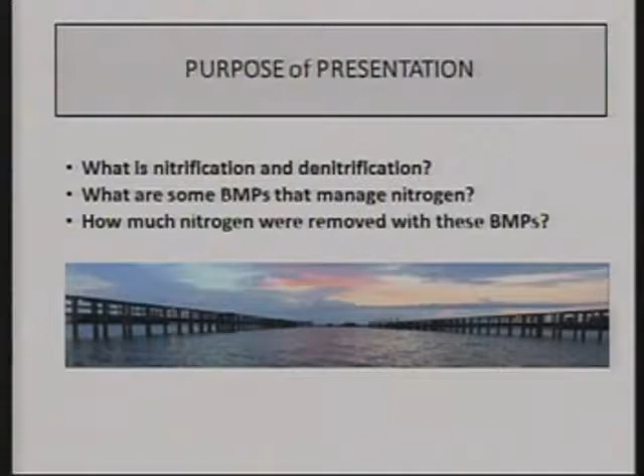Basically, I'm going to talk in general about what nitrification and denitrification are - very general terms, but I've put a lot more information in these slides for those who want to get into more depth. I'll also talk about some of the BMPs used to manage nitrogen and how much nitrogen removal we get when we do these. This is meant to be, in very basic terms, a tie-back to what the nitrogen cycle is all about, and there are various forms of nitrogen within this cycle.

The thing that normally gives us difficulty is the so-called nitrate form, because it's available for plant and animal life. We know the nitrogen cycle is definitely needed for life. In very simple terms, nitrification is the making of nitrates by bacteria, and denitrification is the process of making nitrogen gas using bacteria. Both require very special conditions to operate. For example, nitrification needs oxygen, whereas denitrification needs little oxygen - zero or very, very low. It also requires a food source - by food I mean nitrate is a food, and so is ammonia. So the whole system, to make it work, needs certain conditions to enhance the operation.

The abundance of these organisms is there. They're ubiquitous, they're naturally occurring. They definitely need water or soil moisture, not necessarily saturated conditions, but a soil moisture condition in which they can operate. If these basic conditions are there, we can use nitrification and denitrification for nitrogen control from fertilizers, either in green roofs or in plants that are in grassed areas and so forth.

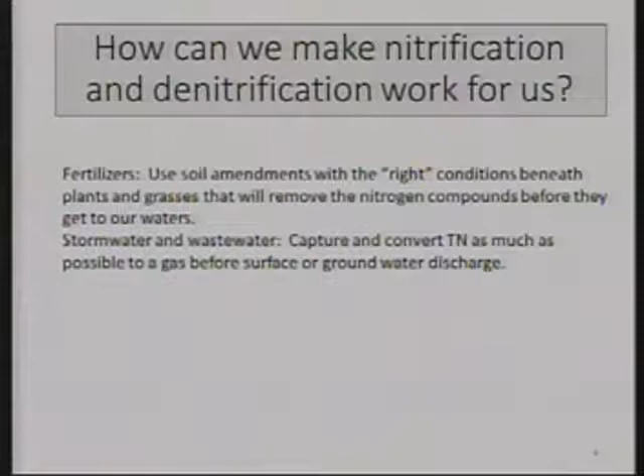And of course, we could also do the nitrification, denitrification cycle in the capture and conversion of the nitrogen forms into a nitrogen gas, which is then released to the atmosphere. So in one case, you can hold the nitrogen compounds that are needed for the plants, so the plants can use them. And in another case, you can convert that to nitrogen gas. And that is if you have these right conditions.

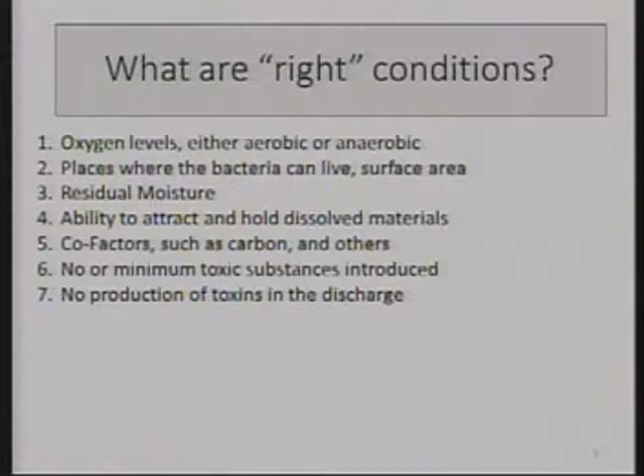I'm just going to concentrate a little bit on the moisture concentration. You have to have moisture within the system. You have to have no toxic substances, and you cannot produce toxins either. I've examined over 50 different naturally occurring and recycled materials in our research, and some of them are toxic, especially at 100% usage. Others are non-toxic when you reduce the amount of composition. So if you use 5% or 10%, they're not toxic to the environment. But you have to make sure that any kind of enhancement you use for the bacteria to grow doesn't result in toxic conditions.

Also, you want to do something that has a long life expectancy. So you want to minimize the operating cost over a long period of time. And of course, when you get down to it, you want to look at the maintenance costs and so forth.

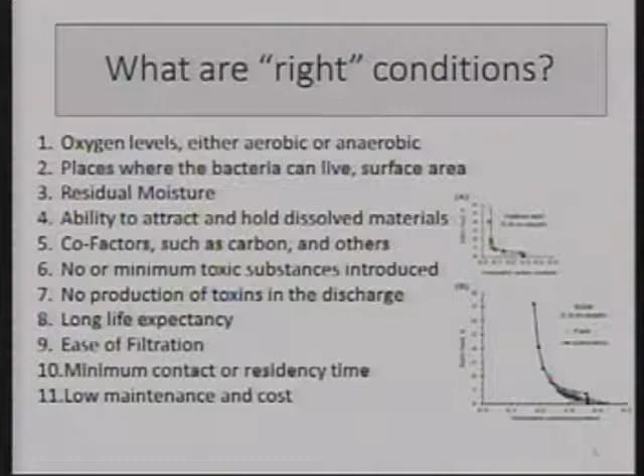We usually look at a BAM mix that has a dry period of 30 days. In other words, the soil moisture will stay in there enough to support the bacteria for a quick recovery within 30 days, if it has a dry period of 30 days.

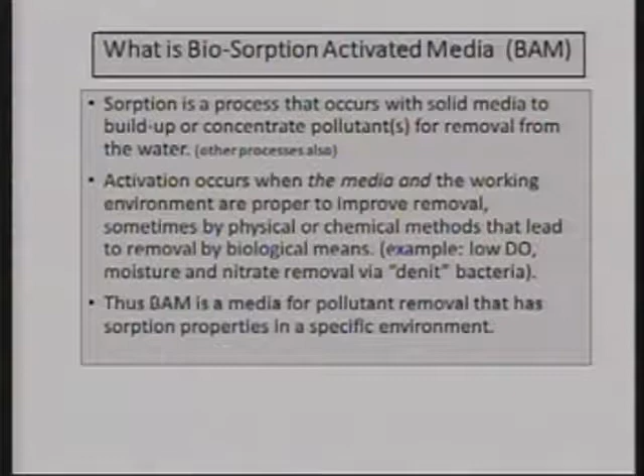Now, I've used the term biosorption activated media. It's simply a solid material which accumulates pollutants in a dissolved format and then turns those pollutants into some other form, such as nitrogen gas through the denitrification process. It has to have a specific environment.

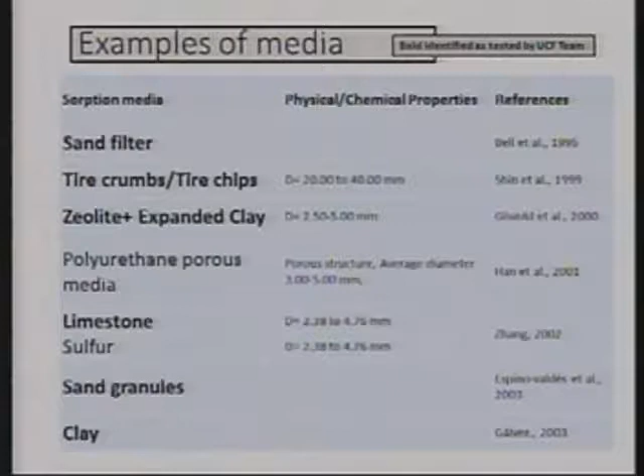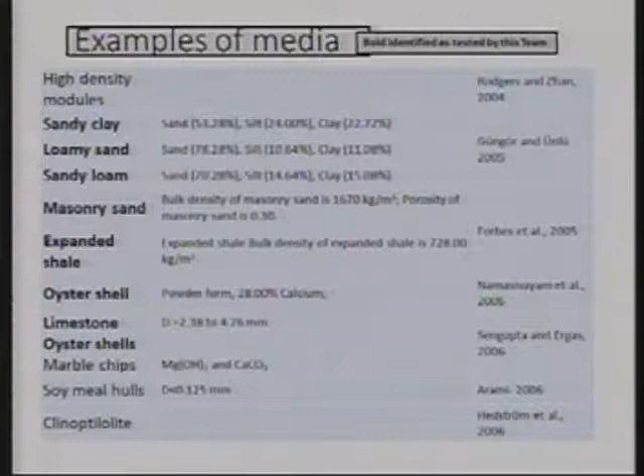Now, I said I've worked with over 50 of these in the past, and these are just some of the ones that are bold on the screen that we have extensive work with. I've also provided references of other people that have worked with these systems. All of them have certain qualities associated with them, and of course a cost associated with them, which has to be dealt with when you're deciding on what kind of mix you want to use for a particular application. So I've listed all of these for your review.

I also wanted to mention some of those that we have used beyond the kinetics, and kinetics just means removal. All of these have been known to remove pollutants, okay? And I've dealt with many of these ever since 1977, so we've had a long, extensive history.

And these are systems in which we have a downflow application and also systems in which we have, I would say, extensive data to support the results, including a lot of toxicity testing. With some of the toxic results we have seen, they were caused by tannins, which are commonly found.

Within some of the wood species, but it's also found in situations where in anaerobic conditions you find yourself actually producing ammonia, or the cycle reverses itself.

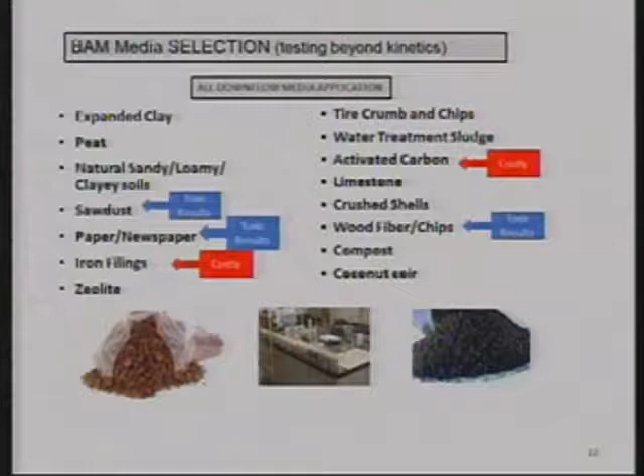But iron filings and activated carbon are costly, but still do a very good job. Why would newspaper be toxic, do you think? The discharge from newspaper? Well, it's the print, it's the ink. The ink becomes toxic. Compost, because of metals, it's hard to get a good compost that's free of metals, so they become toxic.

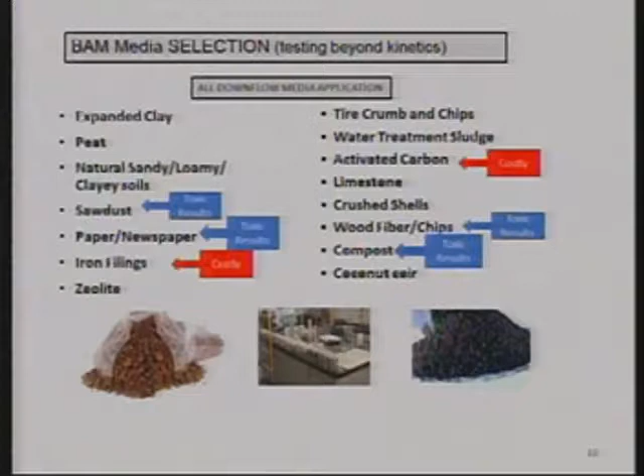Wonderful results with coconut coir. We continue to work with it and continue to use it. I work in the state of Washington and Oregon, where I'm using coconut coir out there because it's available from the islands, from the Pacific. It comes in handily to them. It's still expensive for them, but the salmon industry means something to them, and we're taking out the pollutants which are harmful to the salmon industry.

Peat, I had a hard time finding consistency with peat, especially with the organics in peat. However, I'll say that all of these work. It's just that you have certain problematic areas, especially if you use it at 100% and find toxic results.

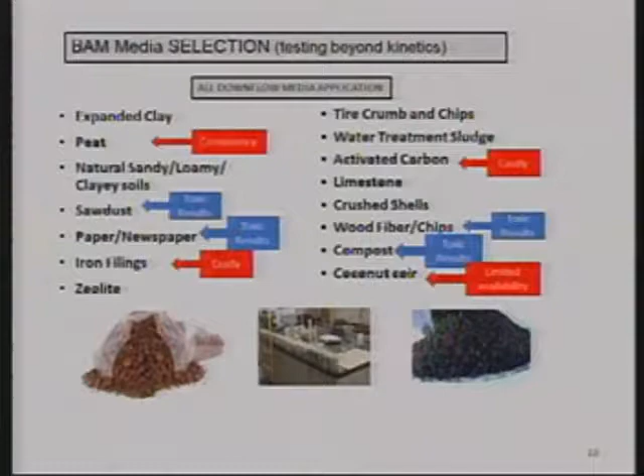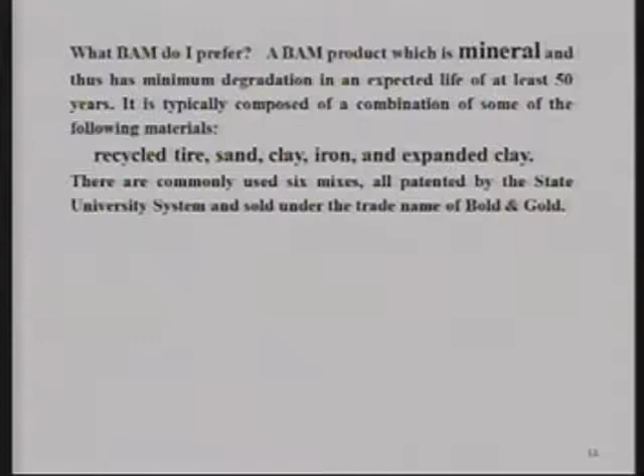I prefer a BAM material which is mineral, which means it exists for a long time, it doesn't decay, it doesn't have organics in it. I have typically used recycled tire, sand, clay, iron, and expanded clay. In all of these mixes, you don't have to use all these blends, but I've used at least six mixes in sites, and I'm going to talk about some of those as I show you the presentation today.

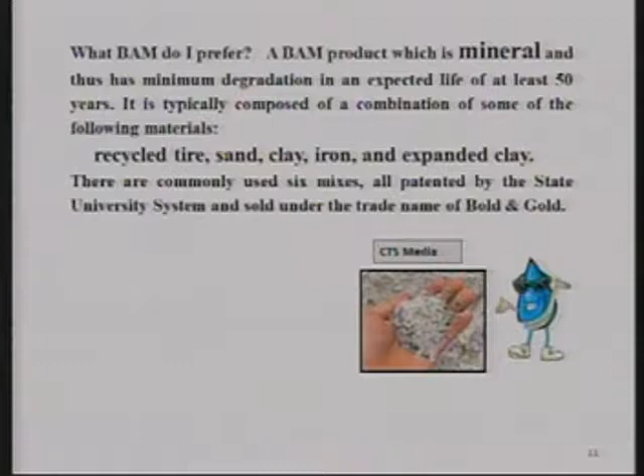One of the media we use is called the CTS media. It's basically sand, which allows that filtration. It has clay in it also. So these blends have been used.

Recently, I started in Pennsylvania, North Carolina, South Carolina, and Texas with applications. Right now, we have a team out in California looking at some California applications. Within Florida, we have over 400,000 square feet of this stuff being used, and with good results.

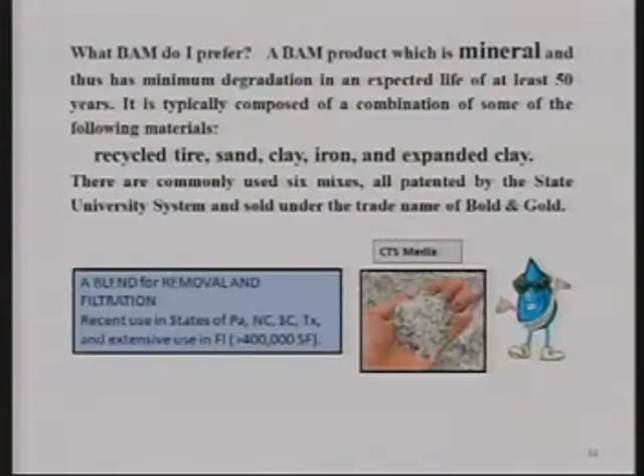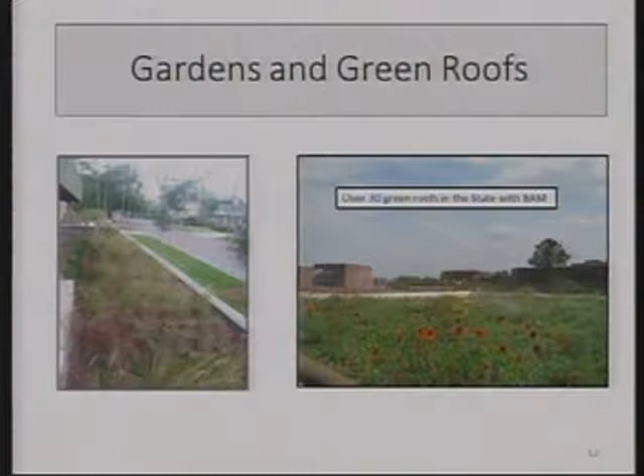There's over 30 of those green roofs within the state of Florida. And the one that's the largest is the Escambia County roof on their one-stop permit building. It's 33,000 square feet, and they've reduced their nitrogen down to an acceptable target level for discharge to the bay up there. There's always ways we can estimate what the efficiencies are.

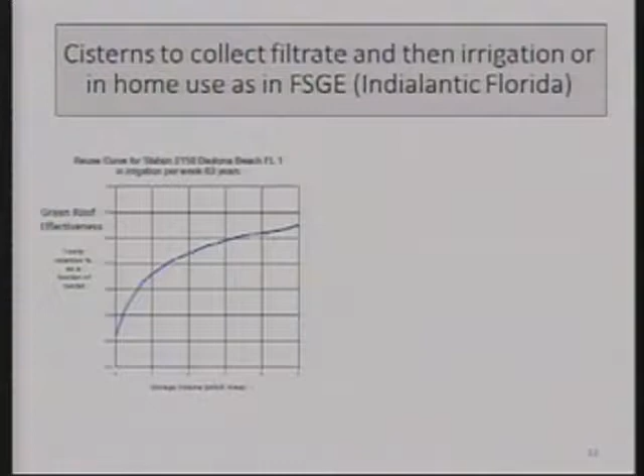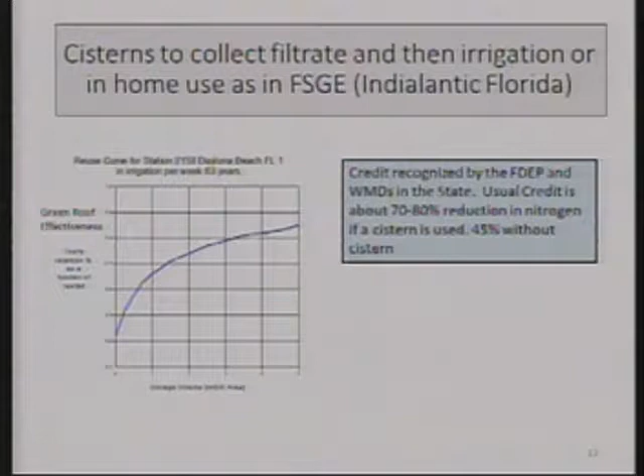And this has to be a green roof. I'm going to talk about the Florida Showcase Green EnviroHome in our backyard here in Brevard County, in Indialantic. We found out that we can reduce the nitrogen coming off roofs by at least 45%, or 70 to 80% if we use a cistern to recycle that material. And you can recycle that or reuse it back on the roofs, or you can reuse that water for irrigation purposes. You must use a BAM material, again, to sequester.

And even at Florida Showcase Green EnviroHome, we use ozone as a disinfectant and other backup means, fully supported by the Department of Health, and we flush toilets there, and we wash clothes. I don't know if you ever smell clothes that have been washed with a high oxygen material. They smell good, like the freshness after a lightning storm, after a rainstorm. It's that nice.

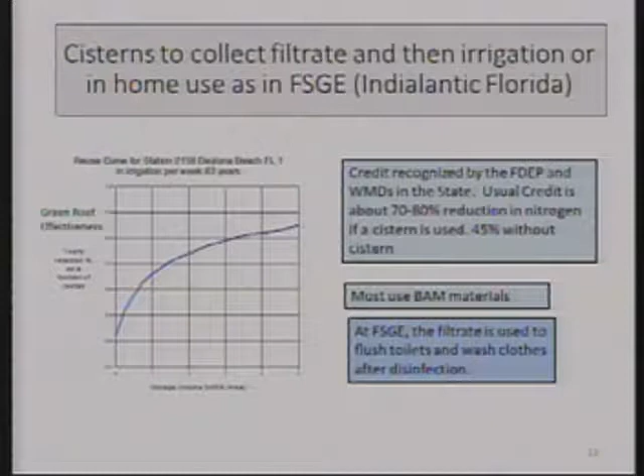Where is it located? Right off Eau Gallie Causeway, down around Canal Street. We were very fortunate to get involved with the builder there, Mark Baker, who was building this for his mom who lost her house in one of the hurricanes. The house has been operating now for 10 years, fully operational with BAM and recycled material.

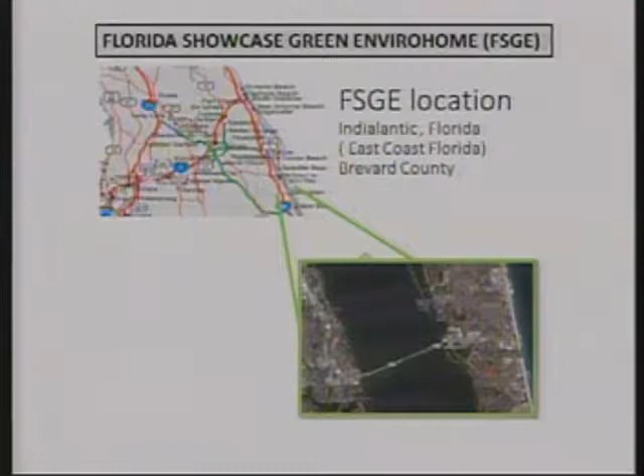Here's a picture of the site, green roofs going in, the vegetation with bioswales.

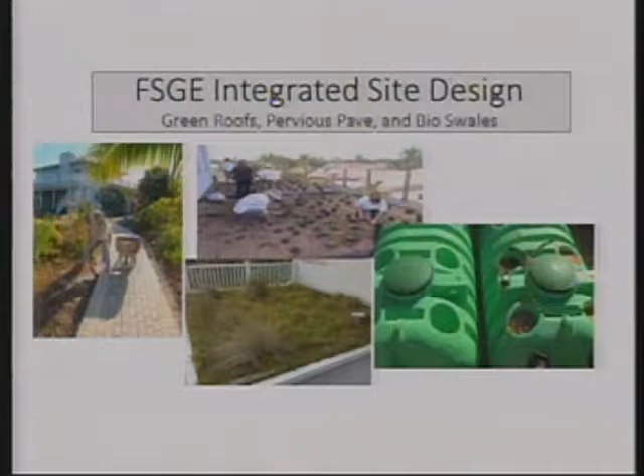We had pervious pavers and pervious pavement. And on the right-hand side, those two tanks add up to about 4,500 gallons, which is the suggested size or the fill size for water that comes off the roof, and also water that is used in the house but not touching any kind of toilet operation. So you're talking about sink discharges. They all go into these tanks and then are reused in the house.

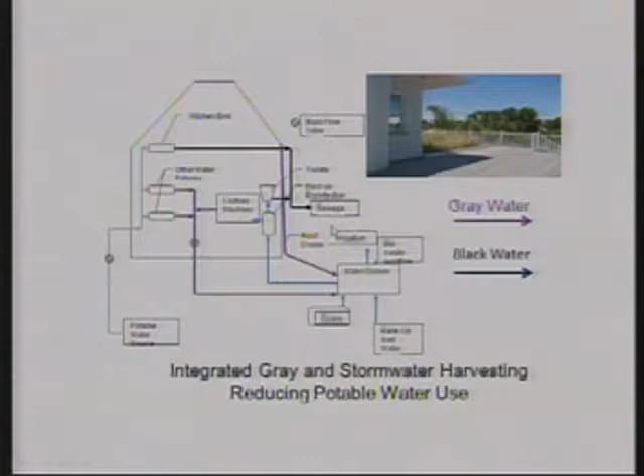That makes the house a gray water house also, which means that the water that's coming from the cistern you have down the bottom here, see that little water cistern here, the water coming from that goes back in with some backup disinfection after ozone, washing clothes, then flushing toilets, and goes out for sewage treatment. They have an on-site sewage treatment facility. It also uses BAM.

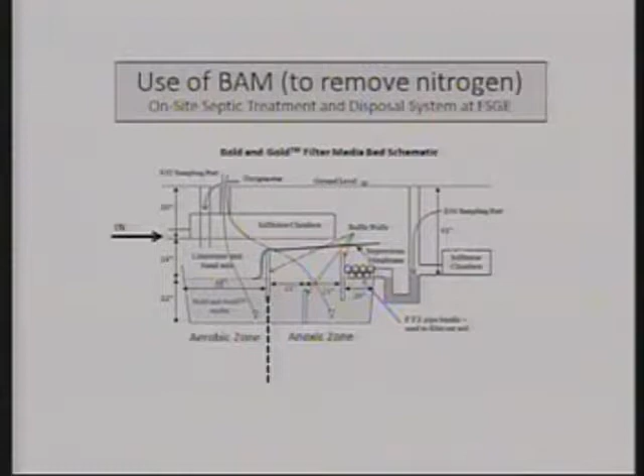The water comes into a BAM mixture called Bold and Gold. It's an aerobic zone, so you have that. Aerobic means you're getting rid of the ammonia and organics into nitrate, and then in the anaerobic zone or the anoxic zone, the nitrates go to gas. So pretty simple. Passive too, by the way. Don't need any electricity. This is all working on a passive mode. And we sampled S1 port, which is input to this after the septic tank, output S4, and I'm just going to show you some of the results here.

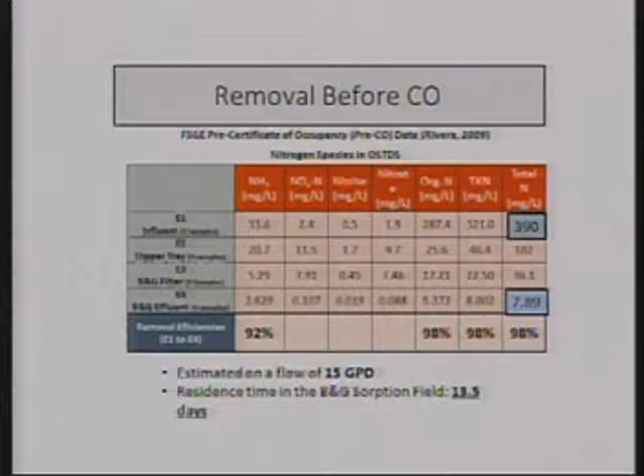Interestingly enough, before a certificate of occupancy, you have very little water going in the house except construction workers, which may have to use the facilities, the toilets, and so forth. But you have very little water from the sinks and from the clothes washers and whatever else you may have water coming from in the house. Before occupancy, all you have is urine and fecal matter. So take a look at the nitrogen content. That nitrogen content should be down around 50 to 60. It's 390, and that's because you're dealing with primarily urinated water. But look at the removal we got from that, 98%, that was before occupancy.

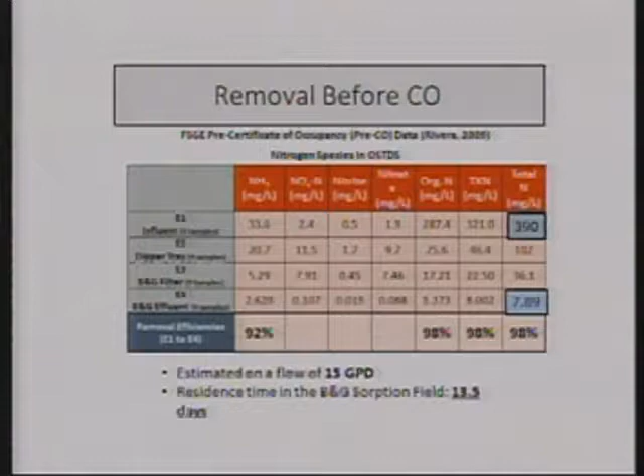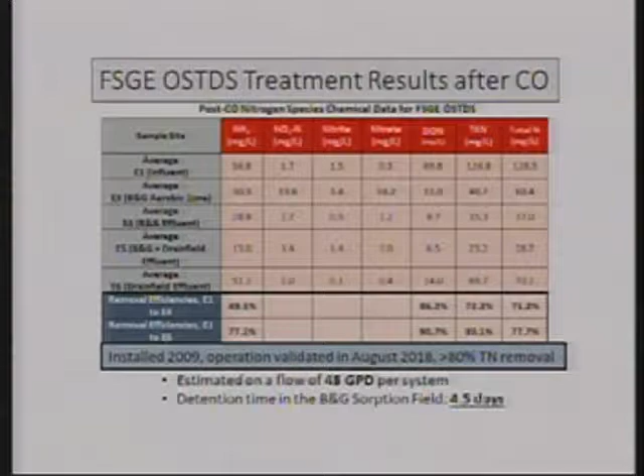After occupancy, the levels of nitrogen went down coming in as 128, and that's because they've reduced the water use so much, but the removal is still around 77%. This is at a 4.5-day retention time. Remember I told you it takes time, right? Whereas the one previous to that was at 13.5 days. So the bugs have a lot of time to eat, where now they have less time, so you have less removal occurring. Moisture content's there, the oxygen and non-oxygen conditions are also there.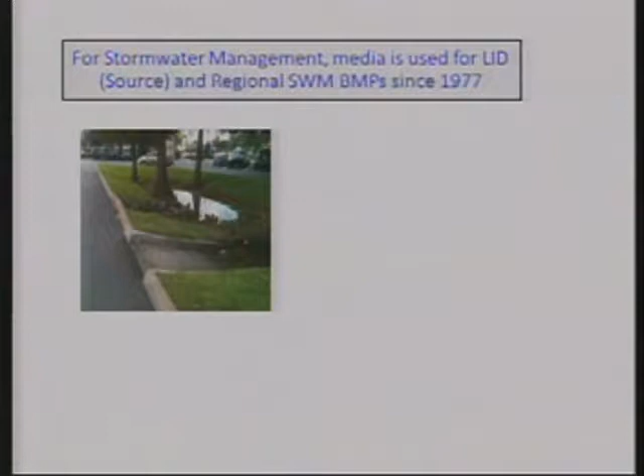Switching attention to stormwater management. Here's a picture of a depression area in a public shopping center. A picture of a regional site, which you may find that's operated by a county or municipality. In the regional site, you have a pre-treatment that has BAM in it. You have also a flood control site. This happens to be a landlocked system, which means that there's no discharge from that. Everything goes into the ground.

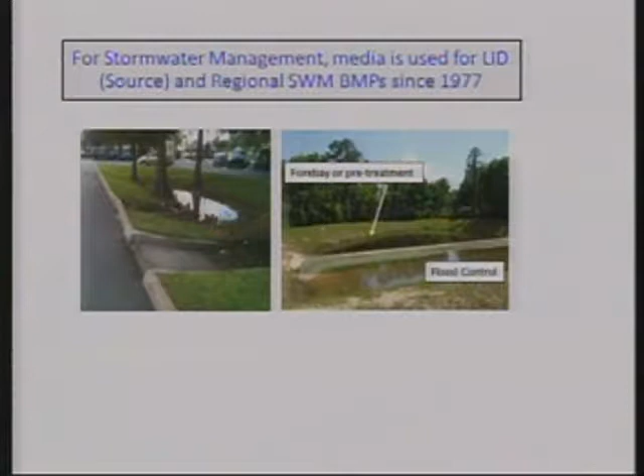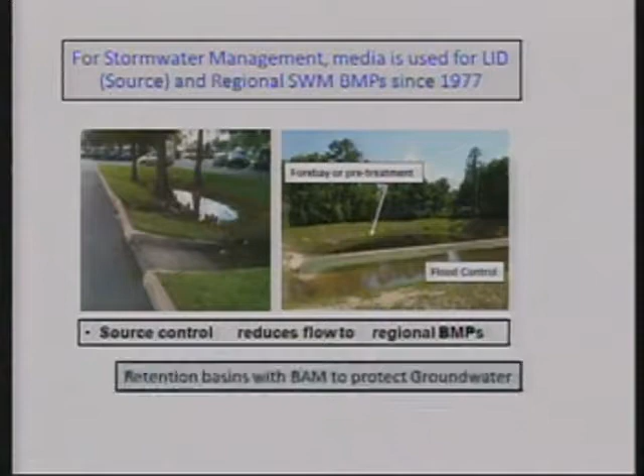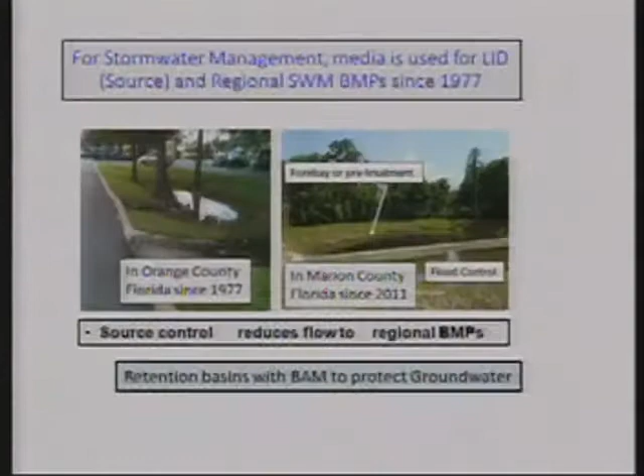And you're saying, well, why do we protect the ground? Well, obviously, the groundwater has been known to carry some of the nitrogen, and it carries it to our springs and to our estuaries, and you're well aware of that problem. But you do have opportunities for source control and regional controls, and by using a BAM, you can protect the groundwater. You can also protect surface water discharges from the BAM. We've had one site working since 1977. That site itself has sand and aluminized-based clay, which is the kind of clay that we've examined, also available within the state of Florida. The other site up in Marion County has been since 2011.

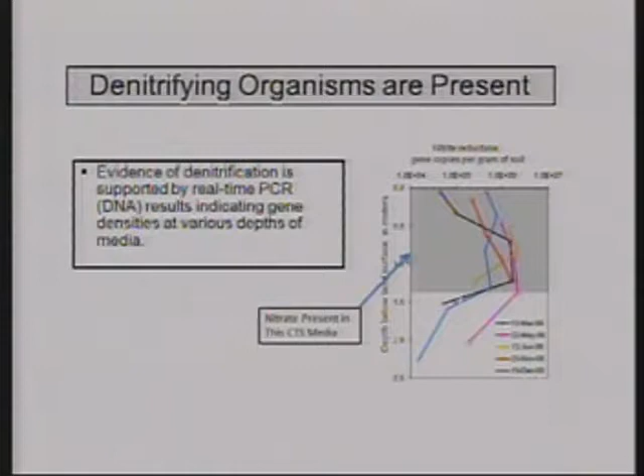Now, to further justify that we really are finding this nitrification, denitrification process going on, we also have a gene machine or a DNA machine, so we can identify what little bacteria are there, those little buggers. So we can come in and actually measure to see if they're there. From a lot of the investigation, we have identified the DNA associated with the gene densities of the various types of bacteria that we're using. And this happens to be one from a stormwater system.

Now I want to talk about another area too, to show you the wastewater application, because up in DeLand, they had a RIB which was discharging excess reclaimed water.

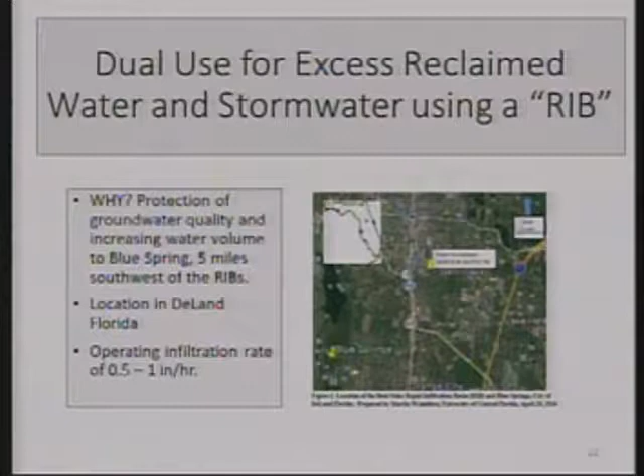They did not want to take their existing facility to a denitrification plant, which had to have a large operating cost, but they wanted to use natural means. We then went ahead and converted one of their RIBs with BAM on the bottom of it, 2 feet deep, so we just brought in the material. This is how you bring it in, big truckloads, or small bags if you wish. And this is a 1 acre site, so we brought in something like 120 truckloads of this stuff.

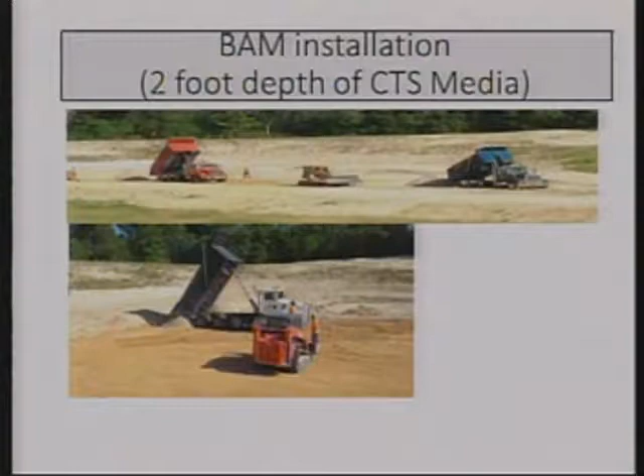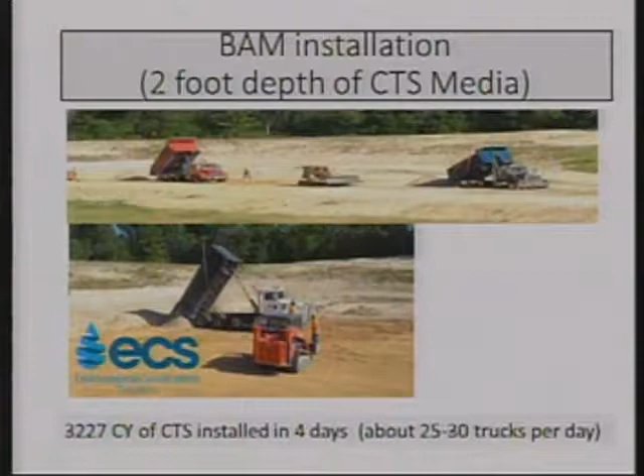And then just by bulldozers and so forth, just flattened it out on the bottom. So no special handling of this material. It's the bottom of a RIB. And we did this in 4 days. The company that did this is ECS, Environmental Conservation Solutions. And they had trucks coming in there from about 7 o'clock in the morning till 5 o'clock in the afternoon, just bringing them in and spreading the material around.

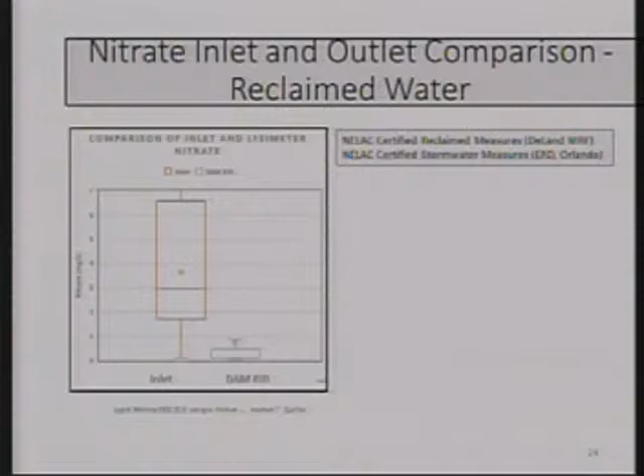This is a little diagram. It's called a box plot. All it says is that the red stuff is coming in. That's the nitrate coming in. It's gotten as high as 10. You don't see that point because it only goes up to 7. The average is about 3.6. And we had NELAC certified labs, which means a lab other than the university, which is unbiased and also certified to do these kinds of analysis. 73% of the time, the outlet samples were less than detection.

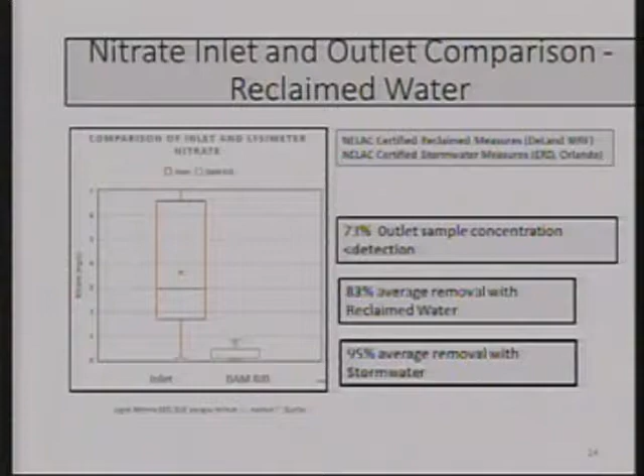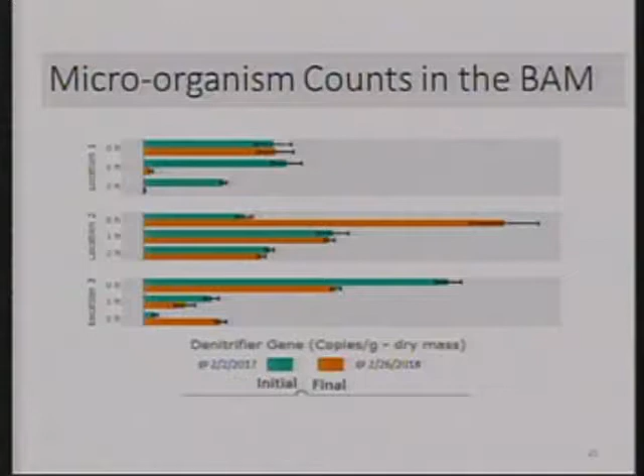Okay. 83% was the average annual removal using reclaimed water, and 95% was the average when we used stormwater in these facilities. Were the microorganisms there? Yes, this is another picture showing the denitrifying genes at 3 locations within the RIB that we were using. So we were again confident that we are getting the denitrification in this particular case. There's a lot of other measurements that go on too. We use all kinds of tracers and other types of water quality analysis to validate some of the structures, and all this has been published and peer-reviewed over time.

I'd like to leave you with the idea that there are natural systems that work, and some of them don't even take any energy at all. You know, no electrical power needed. They work during hurricanes too, so you can still flush your toilet, et cetera. All right, these are naturally occurring organisms. Proper environments needed, and that's important because I've seen too many failures where people put something in the ground and all of a sudden it's supposed to have no oxygen, but it has all kinds of oxygen in there. We just finished a job for DOT up in Fanning Springs, and they put something in the ground, but yet it was oxygenated. It was wood chip that was oxygenated and actually created more nitrogen than they were putting out.

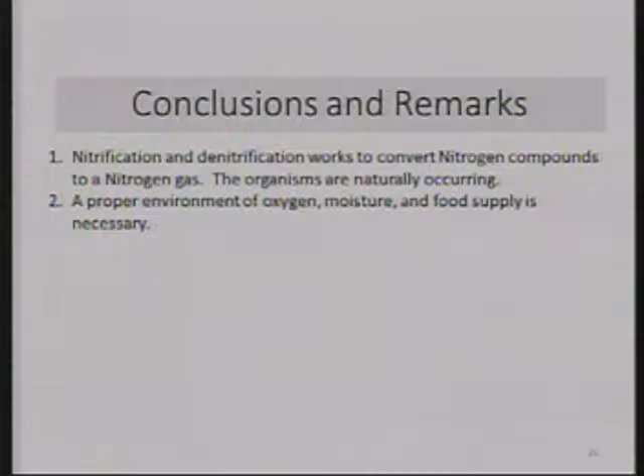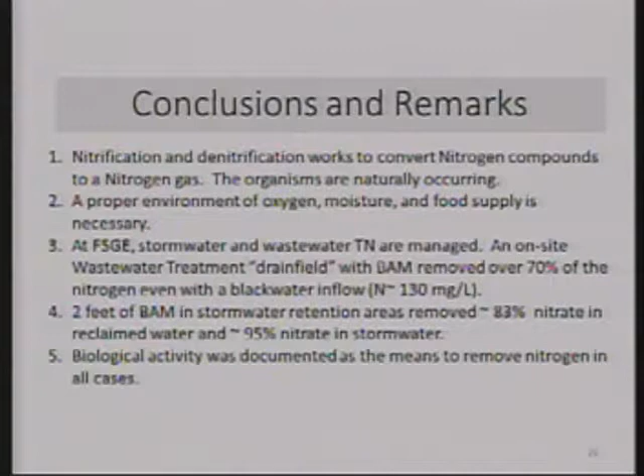The nitrogen underneath that area up there in Fanning Springs was 7 to 10 milligrams per liter. You know, 0.35 is usually the target level for nitrate going into a spring or an estuary. I don't know what it is in Indian River Lagoon, but I've been dealing with 0.35, and we've been able to meet that. You should go visit the Florida Showcase Green Enviro-Home. It's been in operation now for 8 years. We just measured the septic tank again and the drain field, and it's still working, only at 95% this time. We were getting at least 70 when we were there in 2010. In 2 feet of BAM used for stormwater or for reclaimed water treatment, those are the numbers we get. And we did identify biological activity within each of these systems.

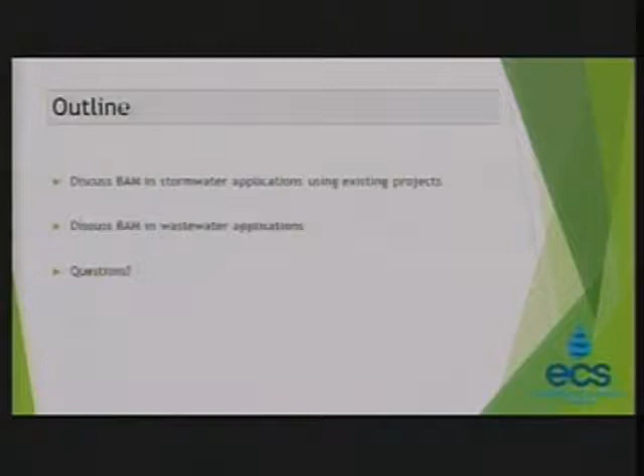That's easy to do here in Florida. Biosorption activated media is being used all over the place in dry basins, exfiltration trenches, things like that. We will also discuss using biosorption activated media on the wastewater side of things. It's a little harder to find projects on that because BAM isn't as accepted by the regulatory agencies for wastewater as it is on the stormwater side of things. And then at the end, we'll get into some questions.

So first, when we're talking about stormwater design, there's two design thought processes that you can go through. First is the conventional designs that we're very used to seeing. It's the stormwater ponds, the wet detention ponds, the roadside swales, things like that. Very common. And then there's also the low impact development theory. And really that's a newer type of mindset that says we want to get the same treatment or better treatment than the conventional design, but we want to do it in a smaller footprint.

Some examples of that low-impact development are the bioretention cells that Dr. Wanielista was speaking about, rain gardens, permeable pavers, things like that. There are additional tools in the toolbox for both conventional and low-impact design, but since we only have 15 minutes, we're going to focus on these 6 that we have up here.

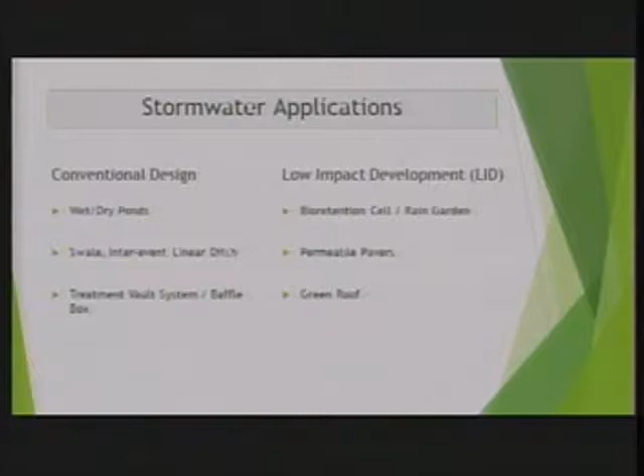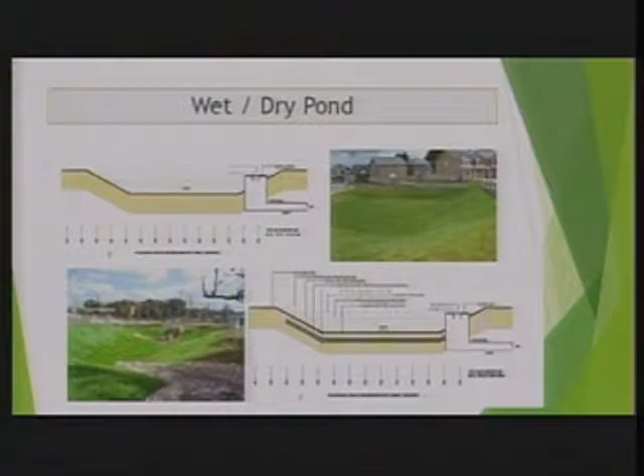So the way that we're able to modify these basins or upgrade them is we remove the top 2-foot layer of soil, we put in the biosorption activated media, and now you have a new and improved modified basin. The schematic on the bottom right shows exactly just that. The dark black area there is the biosorption activated media or the Bold & Gold. That's how you would put it in the design there.

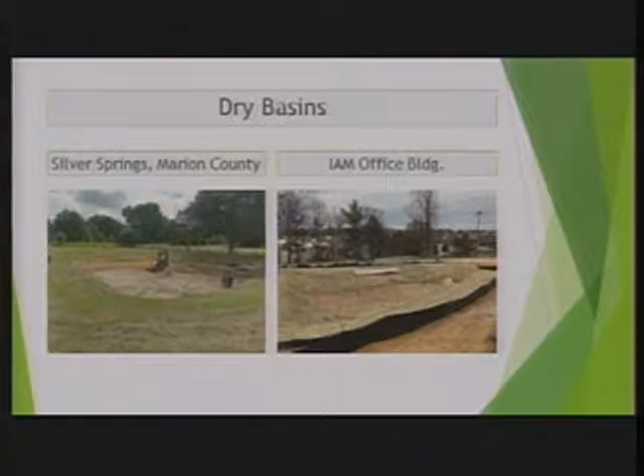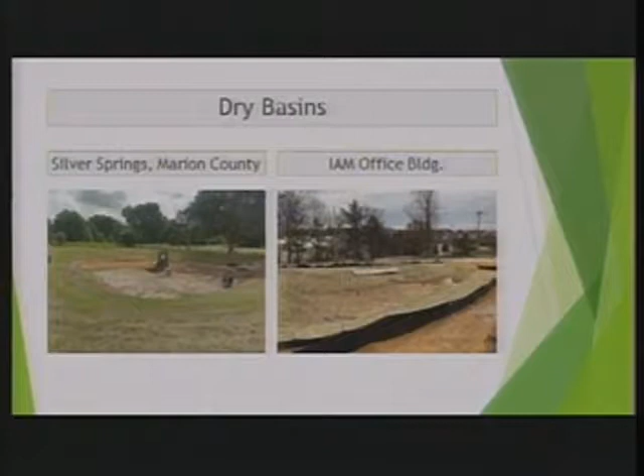These are 2 examples of a dry pond that we did. The one on the left there is in Silver Springs, Marion County. And that is actually just a retrofit of an existing infiltration basin. They scooped out between a 1 and 2-foot layer from the top and just put in the Bold & Gold there, put in some fill materials, sod, and they were good to go, move on to the next one. The picture on the right, very similar application, same process.

When it comes to wet pond design and using BAM, it's a little bit different because wet ponds don't work exactly the same as dry ponds, where they infiltrate down in the bottom. The wet ponds usually go out through an overflow structure and out to your receiving water body or to your next treatment. So we had to come up with an innovative way to treat the water for a wet pond. So these next 2 slides are research projects that we're doing in North Carolina.

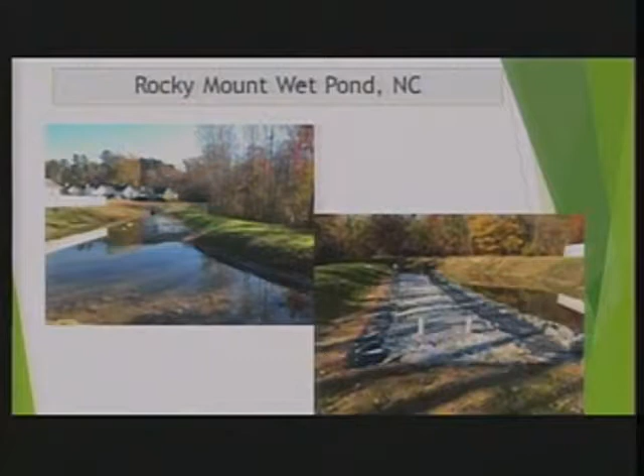This next one is another wet pond that we have in North Carolina. Same exact design. In that middle picture there, you can actually see that the water has overflowed and gone over our Bold & Gold filter. And through those 2 sampling ports there, we'll be able to pull samples and make sure that that filter is doing what it was designed to do.

This is just a pilot project, so right now it's only on one side of the pond, but once they get good results from there, hopefully we can make it go around the whole perimeter of the pond and then treat more of the water as it overflows.

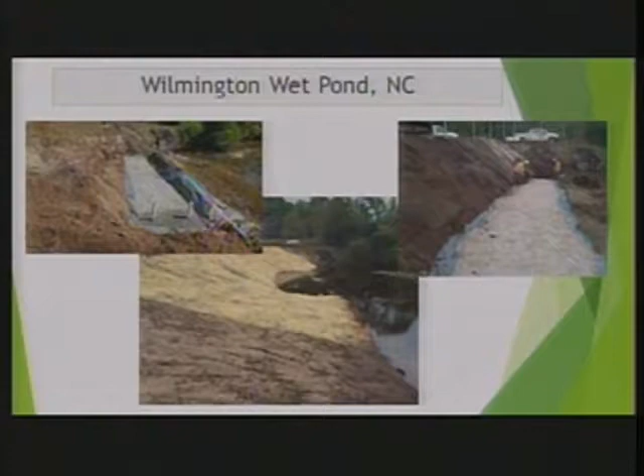Next we'll move on to the roadside swales. You see those as you're driving down the highways, the vegetative filter strips, things like that, very common here in Florida. The science behind this is exactly the same as the dry ponds or the dry infiltration basins. As the water infiltrates through that first layer there, it gets treated. So we do the same thing. We just scoop out that top little layer of soil, put in some biosorption activated media, and now you have a system that does improved treatment compared to your regular swale. I guess you'd call that a bioswale with the biosorption activated media in there.

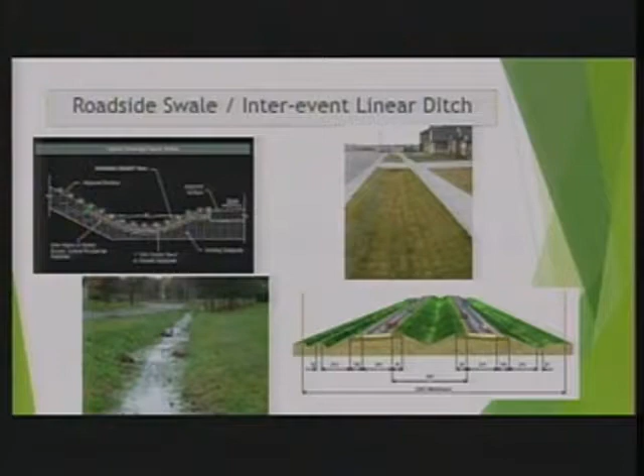I wanted to put this project on here because this is actually the linear ditch that Dr. Wanielista was just talking about in Fanning Springs. The picture on the bottom right is the finished product. It works very similar to a swale, where when it rains, the water hits that top surface, infiltrates through, and gets treated by the BAM that's underneath.

What makes this unique is, you see the picture with the wood chip there? This was actually a side-by-side comparison where we used BAM on one side of that ditch and then compared it to wood chip treatment to see which one is going to do better. But in the picture with the wood chip there, you see the drip irrigation tubing.

So there's a pump that actually goes down into the groundwater. At times of dry period when it's not raining and it's not doing its regular treatment, that pump will kick on, take water from the ground and disperse it over that ditch and treat the groundwater as well. So while all the other swales are being lazy, this guy keeps working 24 hours a day, or while that pump kicks on.

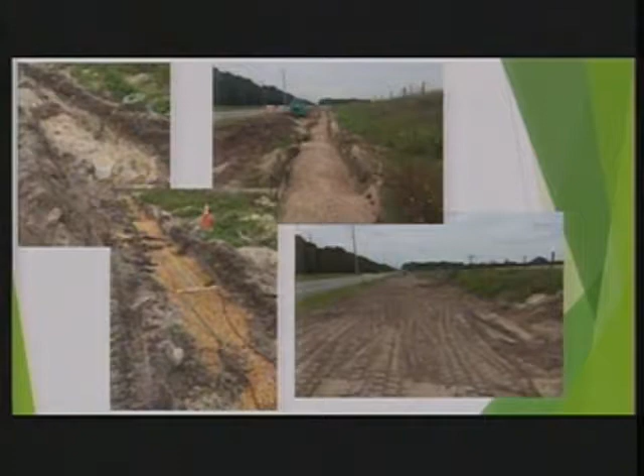The picture on the top left is the lysimeter buckets that we use. It's down beneath the Bold & Gold, so you can actually capture the water there and see what kind of removal you get for that application.

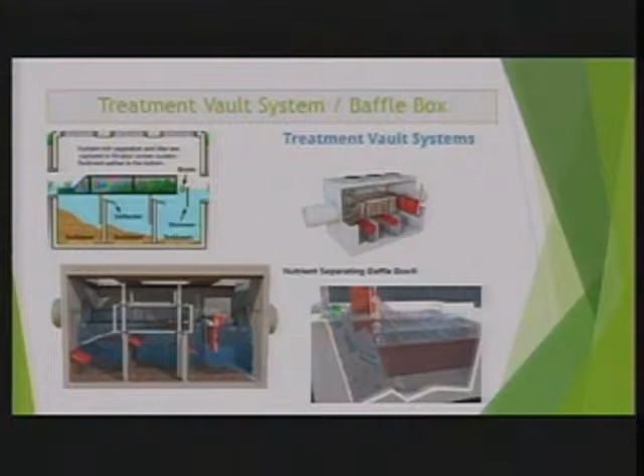A lot of times you hear them call that a second generation baffle box. It's a baffle box that just has BAM incorporated into it. They have a ton of those here in Florida. This is actually one in Cocoa Beach. I'm pretty sure that's Minuteman Causeway over there. But this is one of the SunTree Technologies projects that they've done.

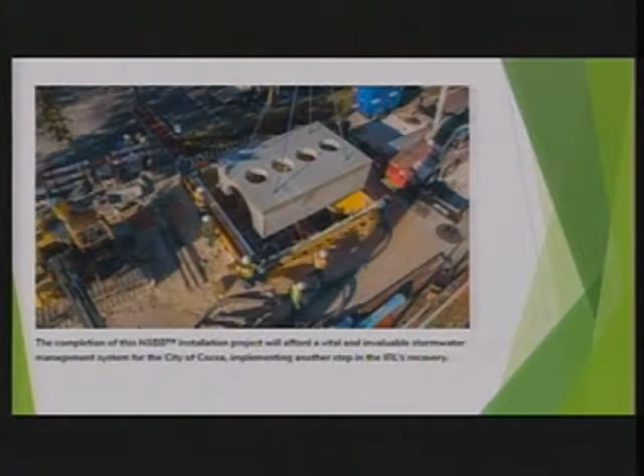I'm going to move on and talk about the low-impact development side of things a little bit, bioretention cells, rain gardens, things like that. To kind of answer your question a little bit, sir, or go farther into that about the depth of the bioretention cells, here, for bigger ones, for an actual cell as opposed to a rain garden, the depth can go all the way down to 30 inches for this one. So we have about a 30-inch depth of biosorption activated media.

In a conventional bioretention cell, you would still have that top wood chip layer to provide the material for the plants to grow, and underneath you would just have native soil. So all we've done is we've removed the sandy soil or the native soil, put in the biosorption activated media, and now you have an advanced bioretention cell.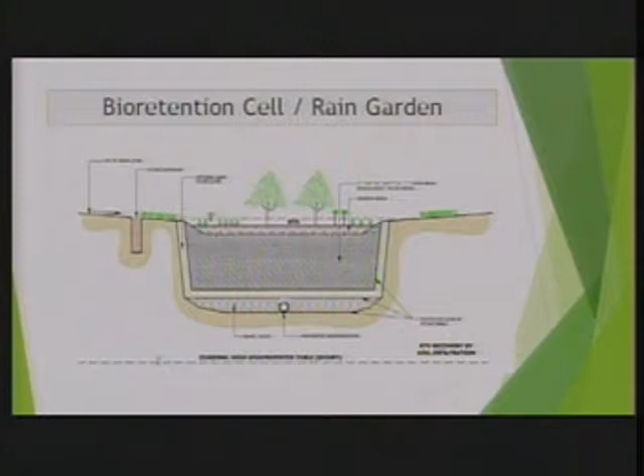As the water hits that sidewalk there, instead of running off and going to one treatment application, it actually goes through the pavers, hits the biosorption activated media underneath there, and gets treated before it goes to your next treatment process. So you're actually able to put them in a train or combine them to get additional treatment or better treatment than you would with just your conventional methods there.

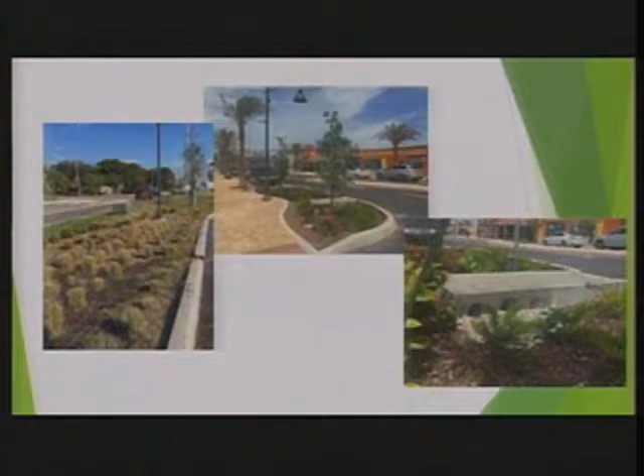So what happens is, in a conventional green roof, that growth layer will provide food for the vegetation, and any nutrients that aren't absorbed by the plants will normally go in your effluent out to your next treatment phase. Well, the pollution control media underneath that will capture that extra nutrients and prevent it from going to the next stage. So once again, we're just improving what is currently being used now for the LID development.

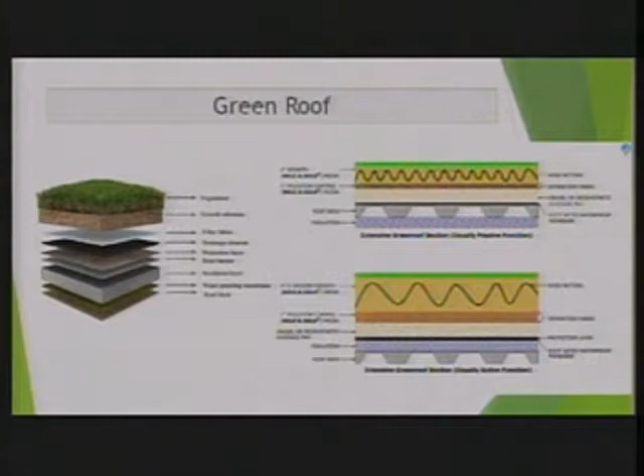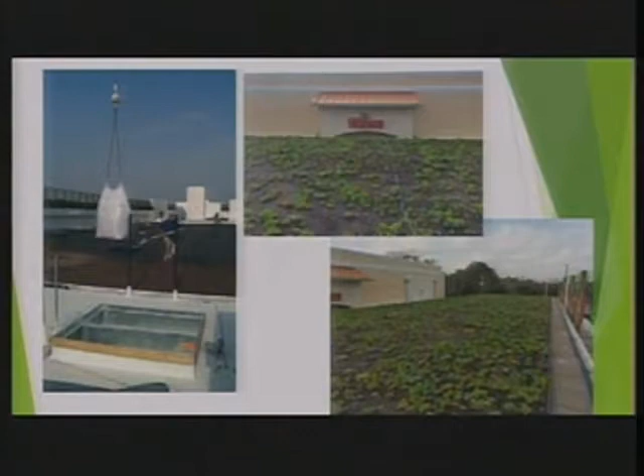All right, I'm going to shift gears, talk a little bit about wastewater applications and how we're trying to use BAM on the wastewater side of things. Here in Florida, the health department has actually just made strides and put out a new rule allowing biosorption activated media beneath the conventional drain field that we have.

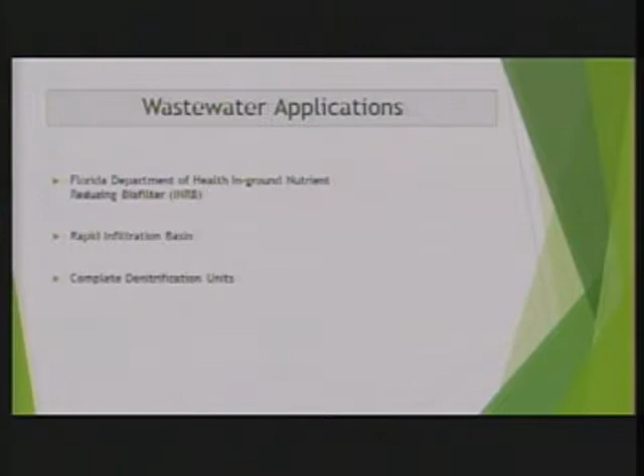Also, I'm going to talk a little bit about the rapid infiltration basin at DeLand from the wastewater treatment plant that reduces the nutrients in their effluent. And then we'll talk about complete denitrification units that are available out on the market. They're just not very popular because they are expensive and they are energy intensive.

You cannot put Bold and Gold or any other engineered media in there currently. We are talking with the DOH right now, trying to figure out how we can use our media in that same configuration. But as of maybe two weeks ago when I talked to the health department, they don't have any installed projects of this configuration going on, so it'll be interesting to see what kind of results they get, how they install it, all that kind of stuff.

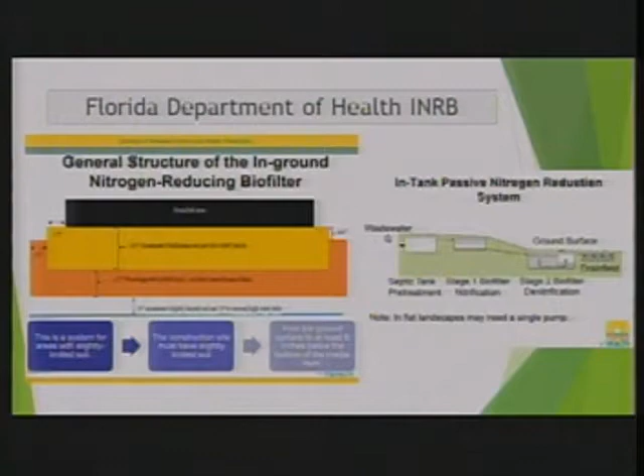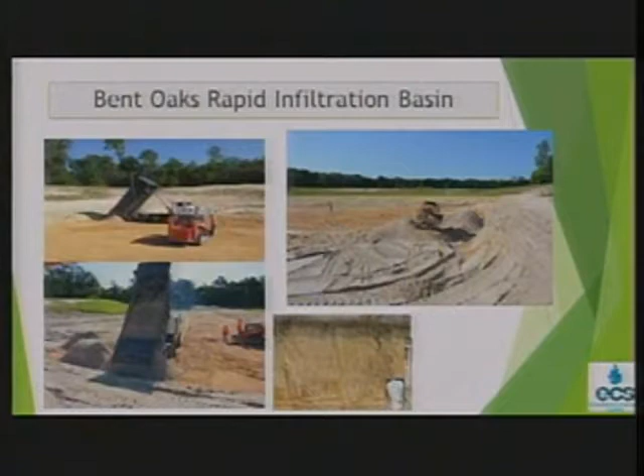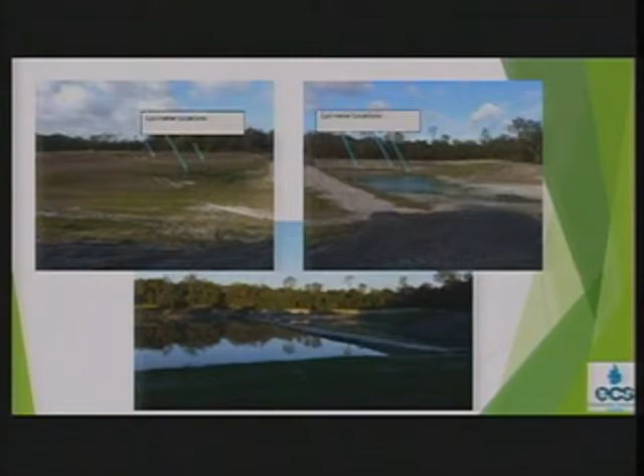both of those basins filled up with about 5 to 6 foot of water. It went all the way up to 12. So interesting to see, we probably had to take a few months' break to wait for all that to drain down before we could pull samples again. That's a whole other fun story for us.

First quarter starts in October.

Finally, we'll talk about complete denitrification units on the wastewater side of things. These are approved for use in wastewater here. You can install them now if you wanted to, but again, they are expensive, they are energy intensive, and that's why everybody is looking for a passive way to try to do this treatment.

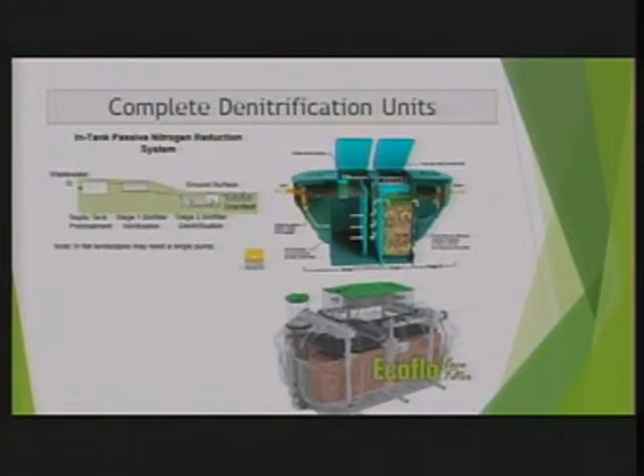Anything else? I have a question for you. Yes, sir.

Your Bold and Gold product, is there a life expectancy for that, or is that a permanent installation wherever it's used? So it depends. If you're talking about nitrification, as long as you keep the environment right, those bugs will keep on eating, keep on working as long as you keep them happy. When it comes to phosphorus load, depending on your concentration of phosphorus coming in, phosphorus binds to the media, so it takes up available spaces. Once all those parking spaces are taken up, they can't park there anymore. At that point, you would need to either replace the media or rejuvenate the media.

And these images you showed of the municipal projects where your media is being used, in those swales and stuff, is that written into the code in those municipalities, or are the planning people at those cities just making conscious environmental decisions to use it? Dr. Wanielista might be able to answer this a little better, but as far as stormwater is concerned, there are written rules stating the type of media that you can use for stormwater projects. It talks about the particle distribution size, what it should be made of, all these different kind of things. But yes, somewhere out there, there is a rule book that tells you what you can use.